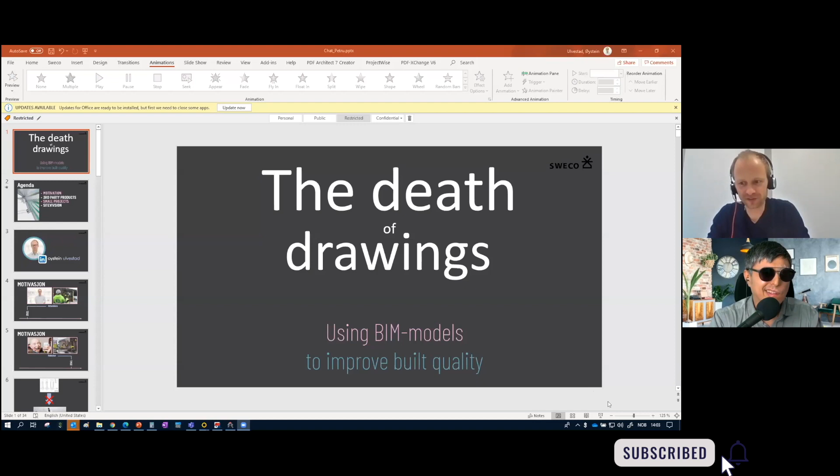Thanks for letting me speak about what I love to do. It's not that often you get to speak undisturbed about the things you really like. You are more than welcome, and you are in the right place because this is what I try to do here. I'm really looking forward to learning from these things because you're working with so many interesting and exciting things.

Thank you very much. So we tried to find a catchy name, so we called it the death of drawings - using BIM models to improve built quality. The title is because we try to do things drawingless, we try to skip drawings. If we look at the agenda for today: a little bit about motivation, why we try to do things without drawings, why we want to build directly from a BIM model and not from 2D drawings. Then a little bit about the advantages this gives us when ordering third-party products for our structure, whether that be steel or concrete. Then a little bit about what size project you need to do this - you don't really need a huge project to take advantage of this. And as a bonus, we'll talk a little about SiteVision and how that can be used in different projects at the end.

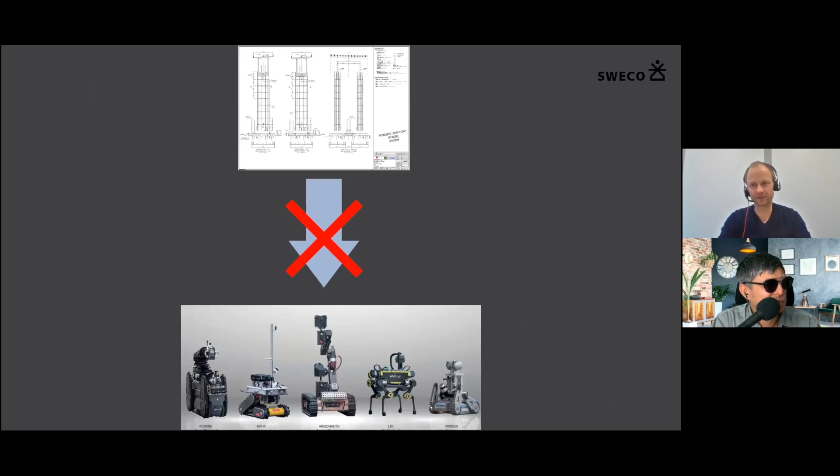If we have a look at this one, this is not the way you will do it. You will not dumb things down to 2D and then feed it to robots. You need to feed them 3D data in some form. Or maybe not even 3D data - they don't need to see it in 3D, right? They can read it as instructions.

But the people making the instructions, they need to visualize it somehow, and that's better done in 3D than 2D. Of course, as long as people are still involved in this. But when we have AI architects and engineers that design a complete bridge instead of us, then you remove the people from the equation, and you have a streamlined, robotized process. Then of course the question is, how do you quality control it without a human? But that's another discussion.

The interesting thing here, and the motivation to do this, is that even in the end, when it happens, you'll have robots doing manual work. But to get there, we need a transition where humans learn to build from 3D models before that can happen.

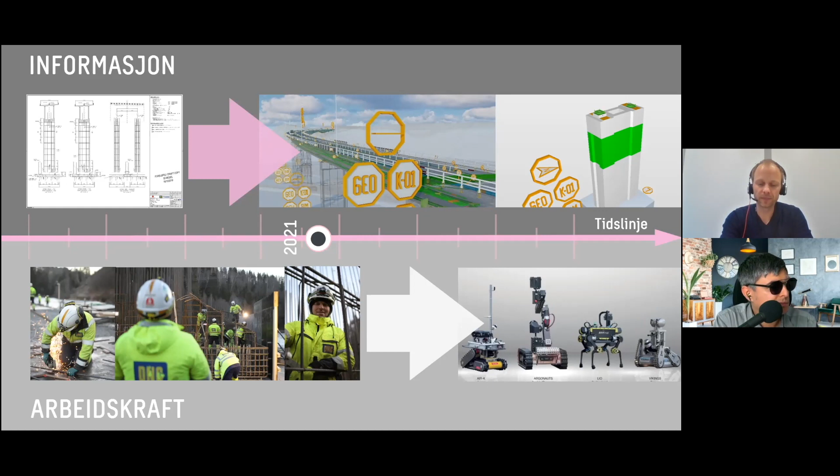We'll also have a look at third-party products, like we said. When we're doing a bridge like the one we're building now, the Randselva Bridge, I'd guess 90-something percent of the bridge is things we produce ourselves - concrete, reinforcement, and to a certain degree tendons. But then we have things like we show in green here.

We have a joint, and it's very important that it's fitted correctly. Normally you'd only have 2D drawings to do this, and in a complex structure with a lot of reinforcement, it's quite hard to foresee everything that might clash. So getting a good 3D model from the supplier is very important. In this case it's Maurer, and they've provided us with the IFC file, which has been very useful.

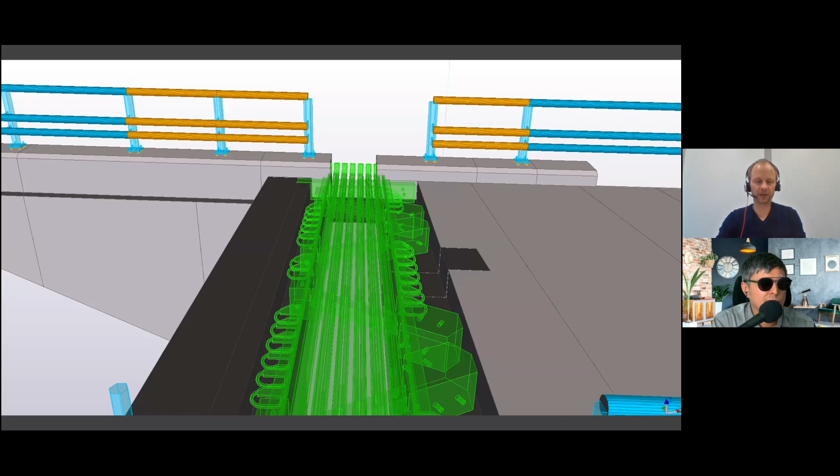Another example is the free cantilever parts. I'll stop here for a little bit just to show the layout of the bridge. So this is the bridge - the joints we had a look at are located at the ends of the bridge, here in axis 1 and in axis 8.

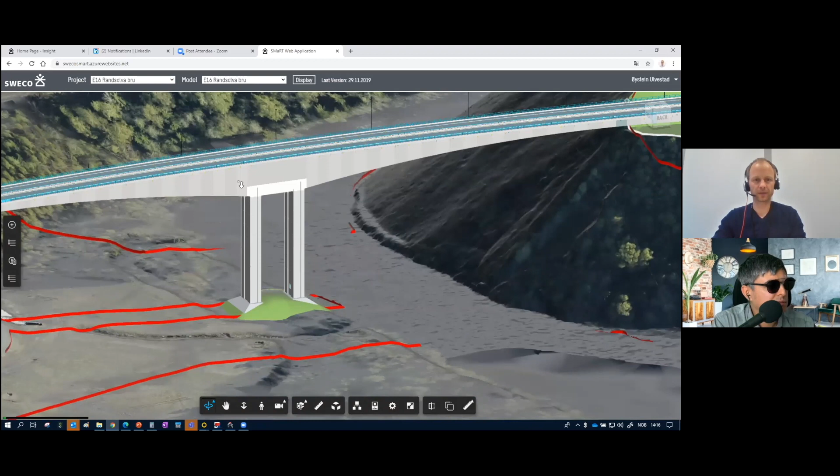For example, when they start building this part, they do the hammerhead first, and then they build the first segments on either side. To build these segments, they need formwork. So you'll have one of these on either side of the structure.

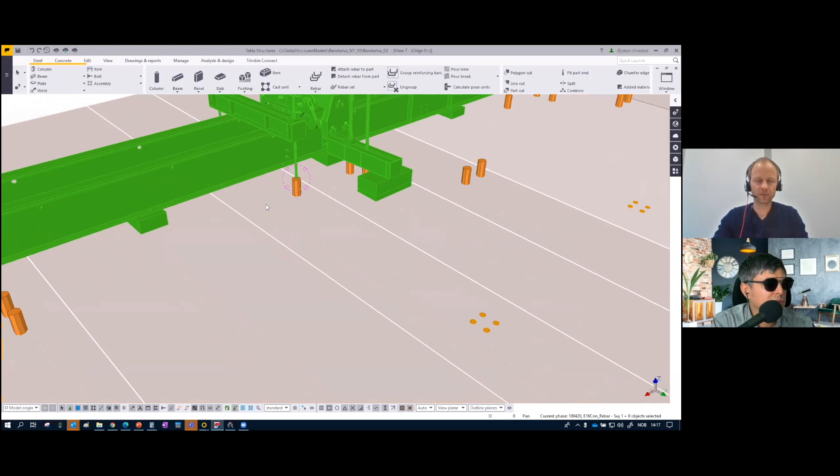And the forces and the weight of this are quite large, so we need to hold them in place, and we do that by making holes in the concrete. Those holes are, from our side, symbolized by these marks. Here we then get a very detailed 3D model of the scaffolding product, so that for casting of the second segment, I can very easily and visually check whether the holes fit the holes I've made in my structure. Because it would be quite devastating if we had to start drilling new holes here.

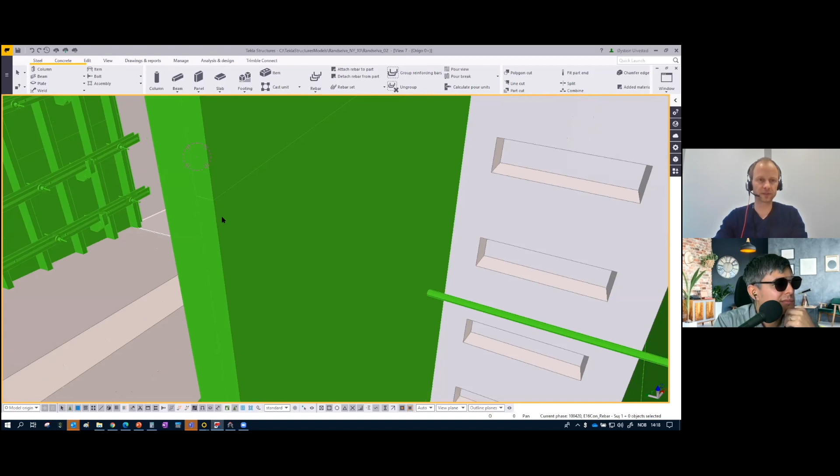And here we see they fit perfectly at all the stages where I need them to fit. And if we go down here on the lower end, we also see that we hit the holes that we anticipate. So this is a beauty of the BIM design and 3D design. We feel we have very good control over things that would be very hard to do in 2D.

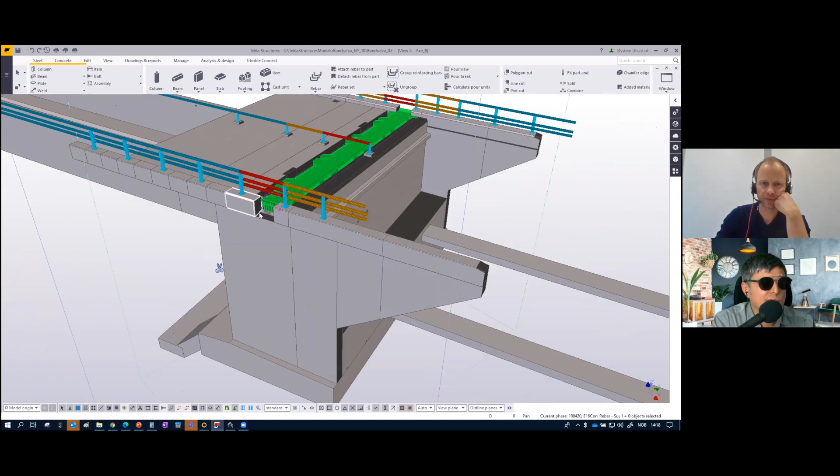And then if we have a look again, here's the joint that we had a look at. What is the joint made of? Steel and rubber, because the abutment is built into the soil, so that doesn't move at all, but the bridge itself expands with heat, and contracts. It's a fuge, right? What is the word in English? Joint in English, fuge in Norwegian.

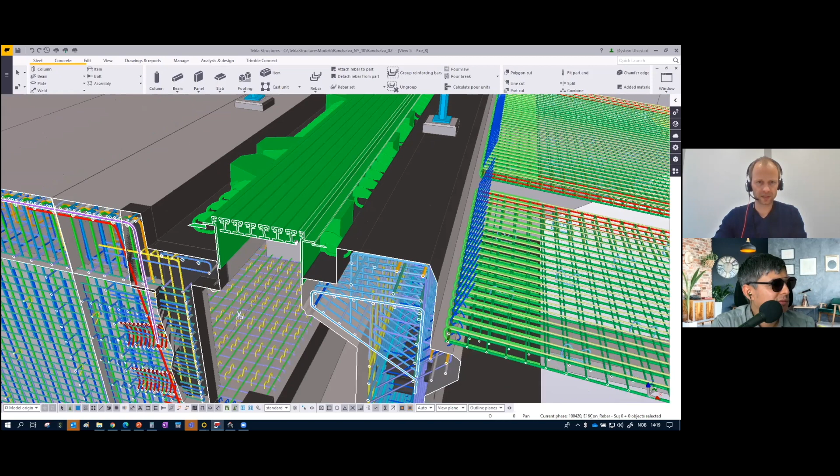And we can then have a look at, for example, the reinforcement, we can then see quite easily what needs to be done. Does it clash with anything we've made so far, and what needs to be adjusted for this to fit, and what bars need to be added so that the joint is properly connected.

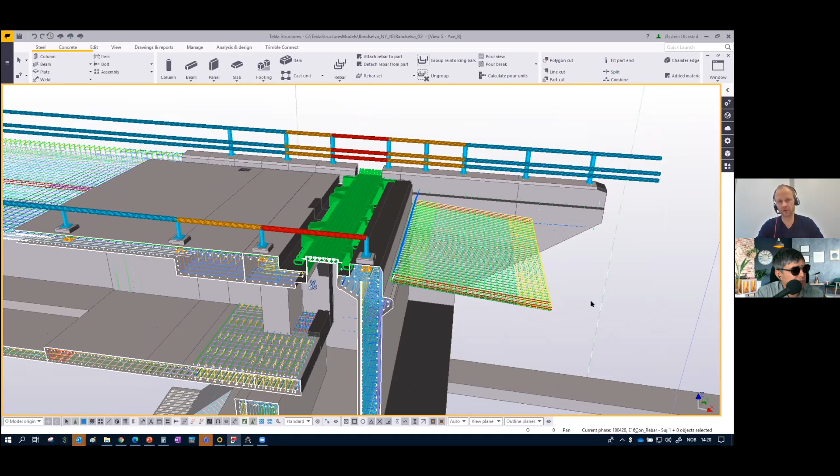So when you write these contracts on third-party products, we see an importance for the people manufacturing and building to have good contracts stating that the third-party deliverer needs to deliver their product in 3D BIM models. That's getting more and more important, because if you only had these 2D drawings like these ones, you would very easily get a surprise at site.

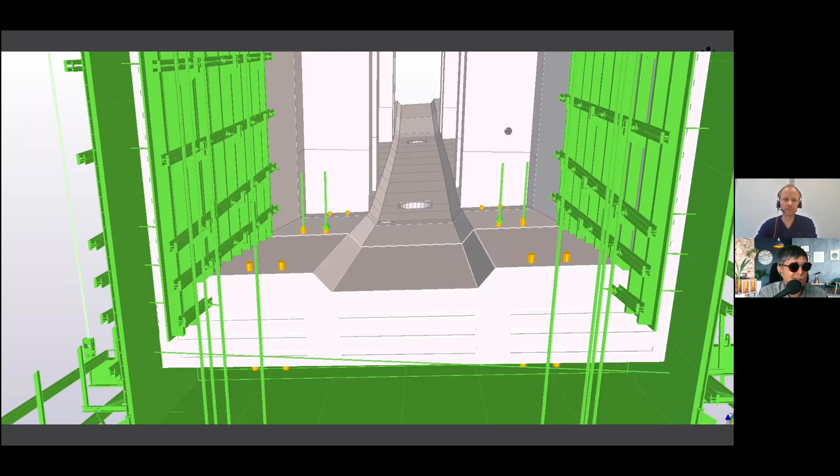Of course, it's been done for hundreds of years, and they've managed, but the quality control you're able to do now is unprecedented. Yeah, that's not an argument, that would be a reason not to improve at all. If we have a better solution, we definitely must employ it. It will lead to more security for people who are working, and let's not forget the very important aspect: saving money, and building it quicker, maybe. Yeah, I agree.

And then we'll have a look at smaller projects like we talked about in the opening. Now this is relatively small, about 4 or 5 meters high. It's a corner foundation, one of 4 in a structure in a building, and it's concrete, and there are some quite enormous forces going into this structure, but it's relatively small in width, and from a 2D drawing, we see there's an enormous amount of reinforcement needed in here.

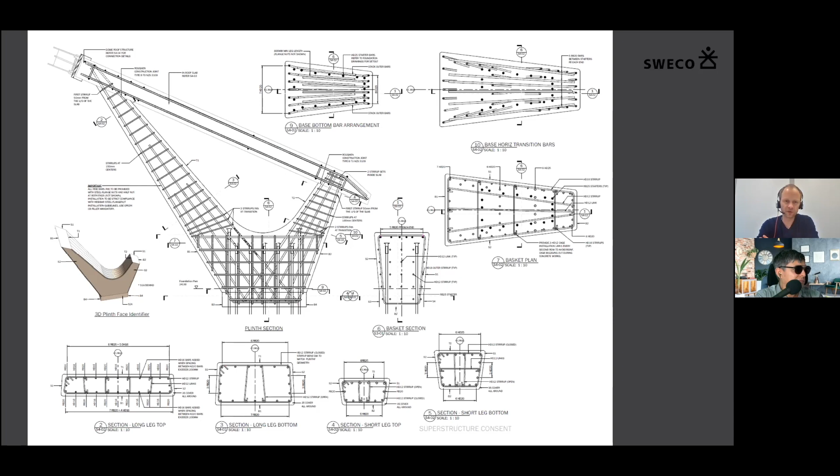When you're doing the design for the reinforcement, it's very, very hard to see in 2D drawings if this is going to fit or not. So if we were then asked if we could do a 3D model of the reinforcement, we'll have a look at the model here now. Let's see.

That's something else. So here. Oh, what is this, a stadium? I wish I could tell you. I can't tell you. It's okay.

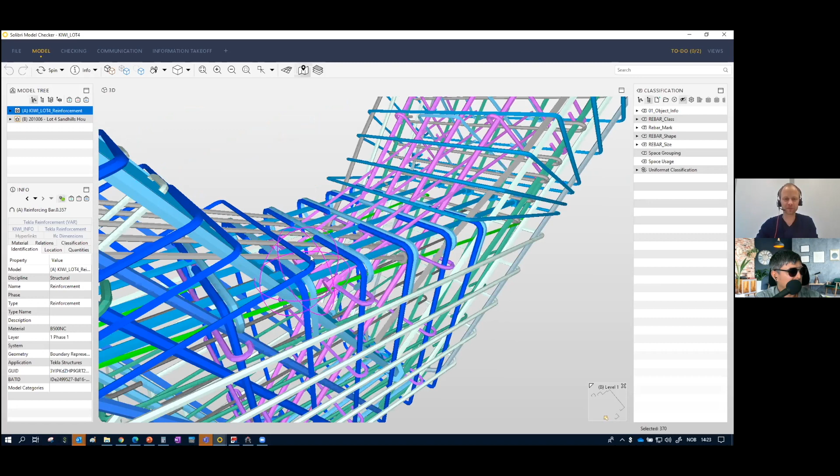It's fine, no problem. But if we see here now, it's packed with reinforcement. It's really, really hard to make it all fit. We worked a number of hours to make this fit, and of course we see some eventual small clashes, but we knew we're going to be able to do that. It's going to be very difficult to pour the concrete here. Yeah, but I'll show you pictures because it's already been cast. Oh yeah, okay, so let's see.

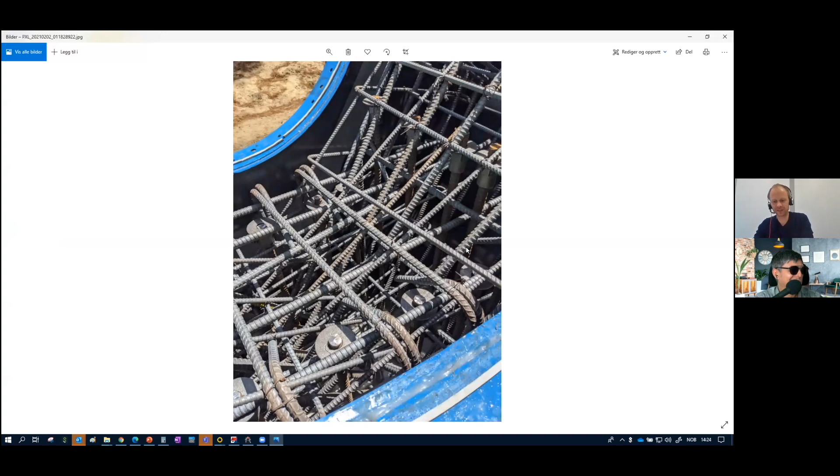Yeah, so this is how difficult it is to fit. Oh yeah, Jesus Christ. You'd need to use a syringe to try it. But without the 3D modeling, it would be a lot harder, because in some of the sections you have 5 layers competing for the same space.

If you don't have the 3D model, there might be a possibility that you cannot build it, because when you did it in 3D, you see that you have place.

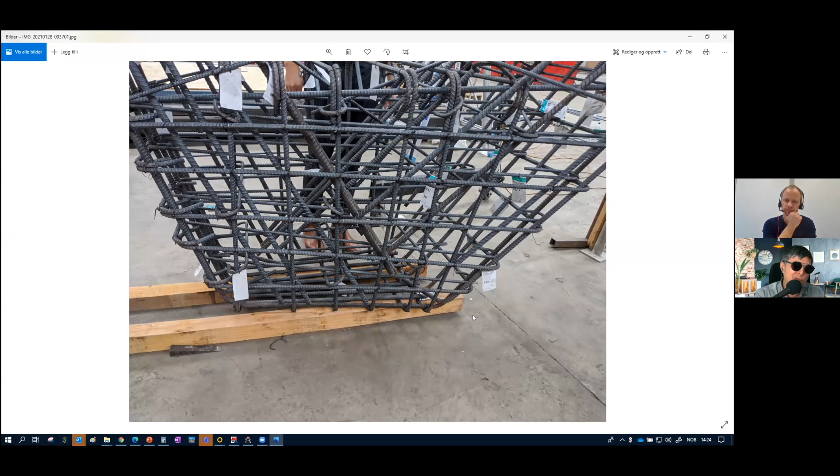If you encounter a challenge, you try to fix it before, right? Imagine being there and being forced to fit all this, and you cannot do it. You just stop the entire crew working and try to find a solution. How much expensive is that to do?

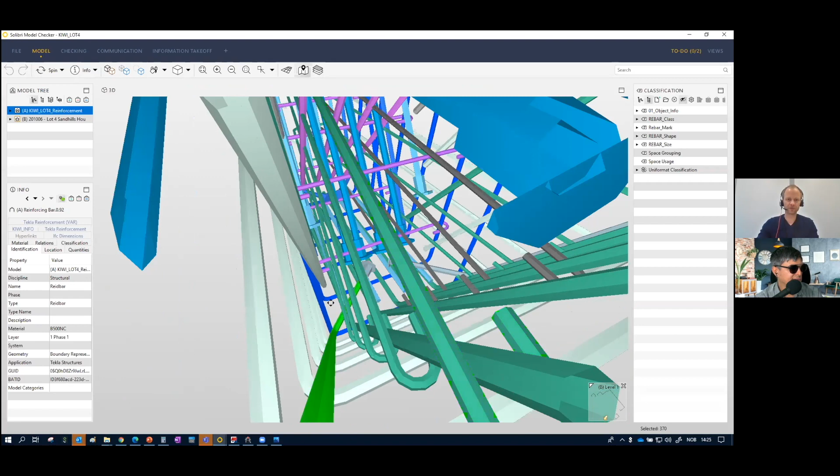Definitely. And as you see, this is a test casting, but it looks beautiful. And again, if we look at some of the layers here, for example this one, see how we have to skew them to make it all fit.

But regarding the one clashing, like what is the thing with them? The ones that we saw clashing down here. Yeah.

Well, these ones, when you model them, you can start bending them separately. But as often as possible, you want a rebar to be part of a group. You don't want to explode it, so every rebar is unique.

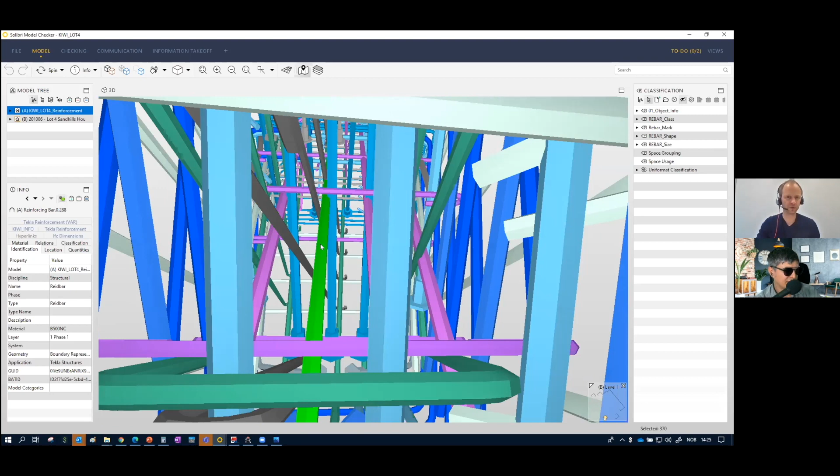So if you can see from your design that clashes are solvable, then allowing small clashes like this is okay, because you can see that if I tilt this a little bit, we will have space.

So what is the measure? What do you do then to be sure that it won't be a clash on the site? So how do you fix this?

On this side, I could show you quickly. Let's see. But before, in the first place, if you would not have a 3D model, you would not have seen this.

Definitely not. And I'm sure they eventually would fit it all, but it would take a lot of manual labor, because what we're able to do now is we can do automatic rebar takeoff with bar bending schedules, so that a machine can bend all these rebars automatically.

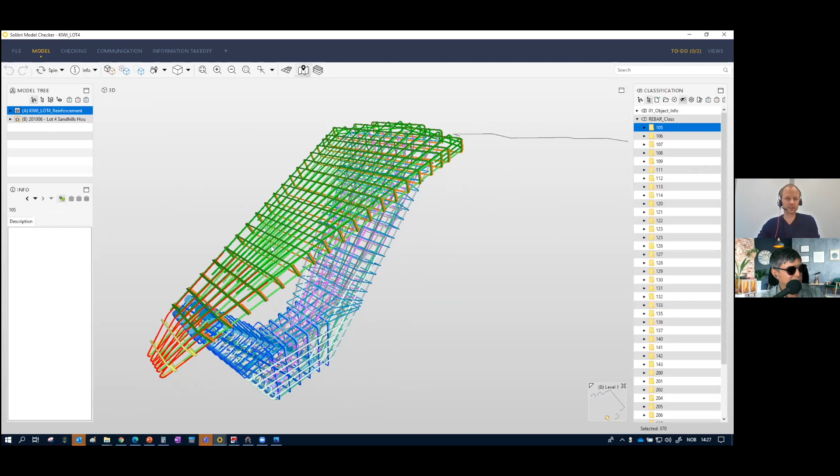And then we do a sequence like this, so that people at site know which of the bars goes first. So from up to down, you just have it in the order they should place them. Yeah, at least our suggestion on how they should place them.

Yeah, sure, I understand. But nice, very nice. Well done. Thanks. And then on an information takeoff, we can automatically take out bar bending schedules.

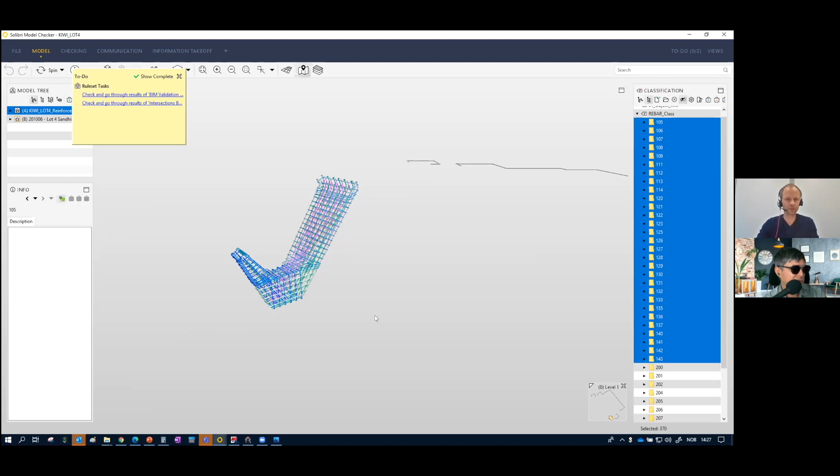And say if I only wanted to take out rebars for the lower part, then I'd just mark these ones, and then do a bar bending schedule for those. And then maybe tomorrow I could do another one for the top.

So it gives you quite a lot of flexibility on large projects, especially when you want to order things.

And do you make any notes in the bar bending schedule for the series of bars that you could not fit in the 3D model, or how exactly do you handle this? We could do that, yeah.

So if we have a look at this one, we have a number of attributes attached to every object, and here we have a number of open comment fields where we could add attributes or information if needed.

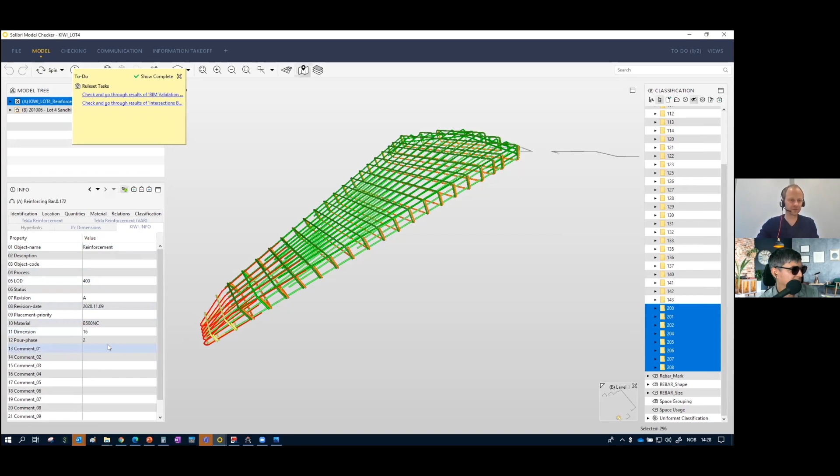In this case, we haven't added much information because there was no need to. But on the Randselva project, we have a lot of information there.

So the casting, I was very impressed by the shape of these. It looks like art. Yeah, it does, doesn't it?

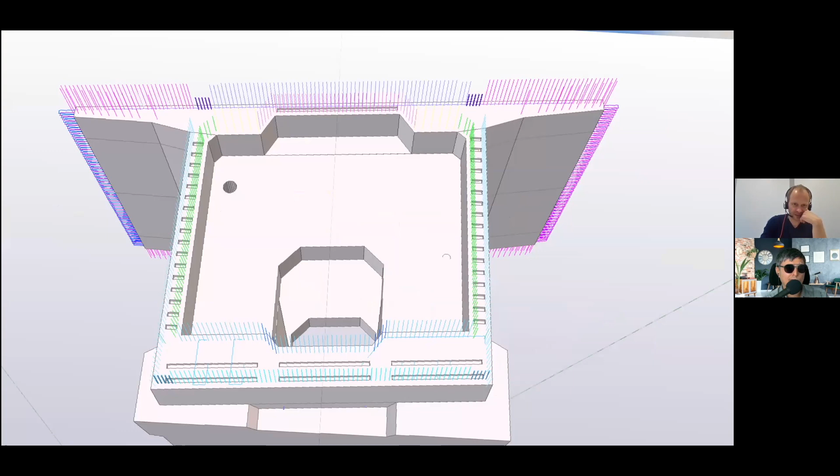Let's see, what else should we mention? Just an interesting comparison: this is the hammerhead of Randselva at axis 2.

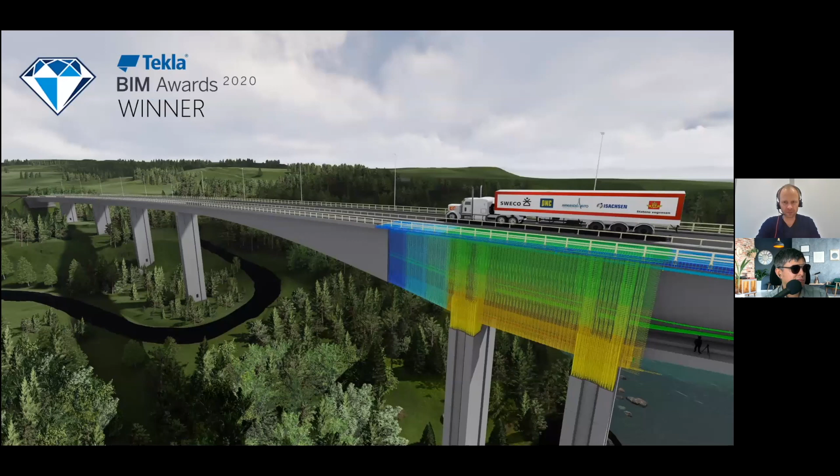And it's been mentioned before, but we are of course very proud that we won the Tekla Global BIM Awards for Best Project in the World 2020. And the last time someone won, it was this project: the Museum of the Future in Dubai.

So that says something really about what a nice company this is to be a part of. Yeah, it was, and it says something about how far infrastructure projects in Norway have come, and how important it is that you have a governing party.

From our case, it's Statens vegvesen, Nye Veier and Vegdirektoratet who work with the industry to standardize data and lead the way, saying that we accept BIM models, we accept third-party control of models and not drawings. So we've been lucky in that way.

Yeah, that's very important. And let's not forget about Bane NOR, they're also doing a great job. Yeah, definitely.

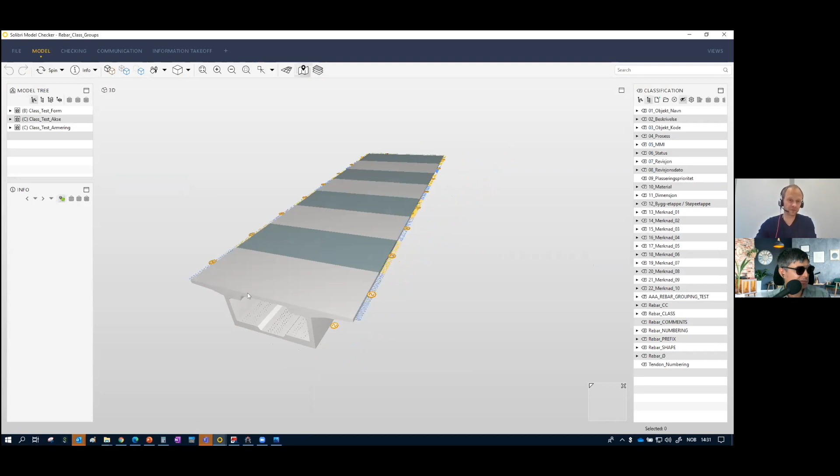Before we go speak about Sight Vision, I wanted to show something about standardization of reinforcement data. Because when you don't have drawings... when you do a drawing of, for example, a section, what you're making is a principle that can be applied to 50 cross sections, and controlling it is fairly easy. But when you do a model, you actually have to control all of the reinforcement of the whole model.

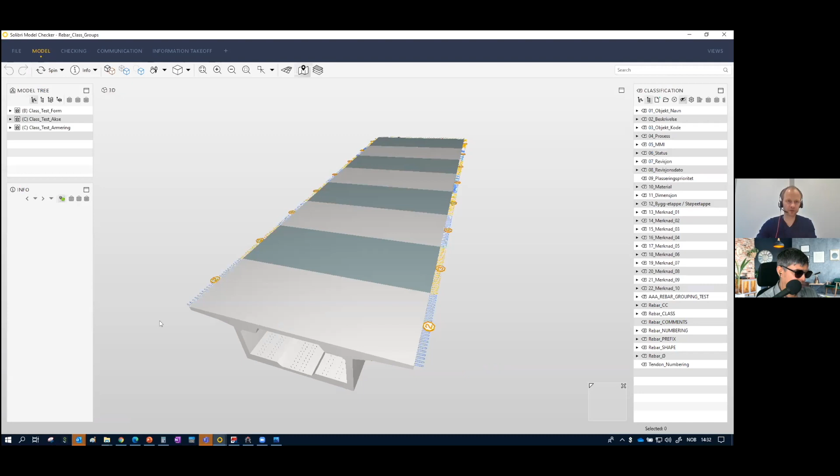So if this was a bridge, instead of just controlling a section, I would have to control all of this reinforcement. And by seeing all of this reinforcement, it's hard to see if there's one rebar missing. So what you want to do is somehow classify your rebars so that it's visually easy to control.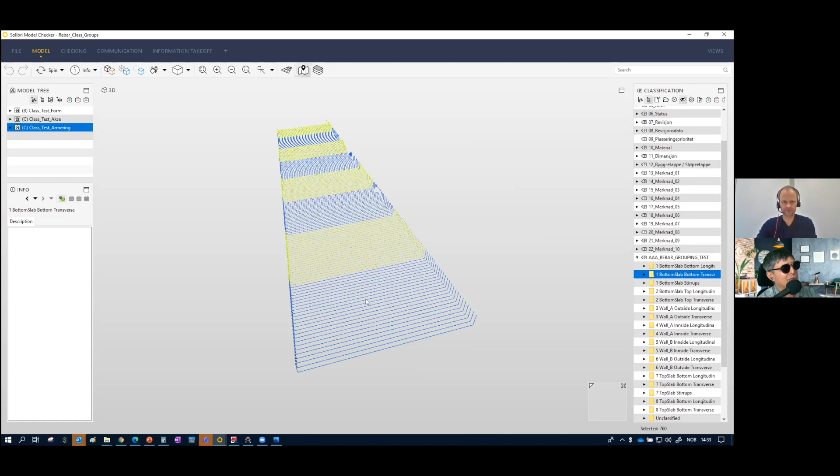So if you see this one - bottom slab, transverse reinforcement - it's easy to understand, and easy to see if something is missing or misplaced. Correct, yeah, I totally agree.

Same with, for example, the wall reinforcement - here we see that nothing is missing, but to do that you need to classify your rebars very well.

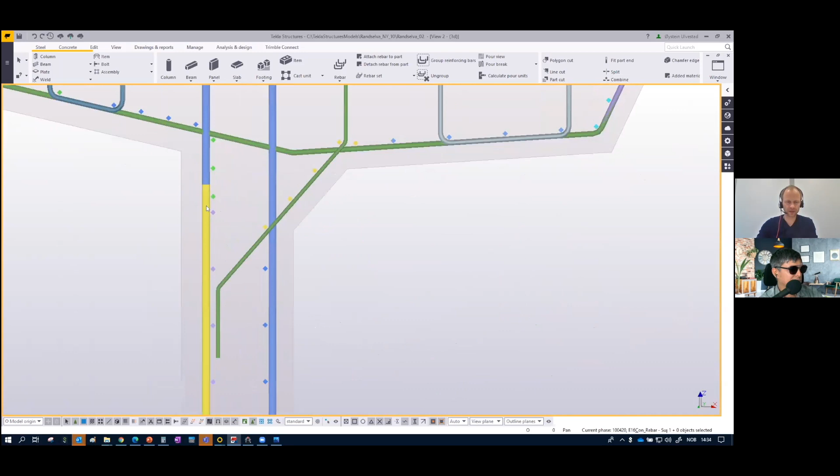So we've used quite a lot of time on these what we call mock-ups, which are simplified, maybe one meter wide parts of the bridge, where we try to make our rule sets for how our model will look. Whatever you're going to do with your BIM model, making these mock-ups will be one of the smartest things you do, especially for things you want to use parametric design to make.

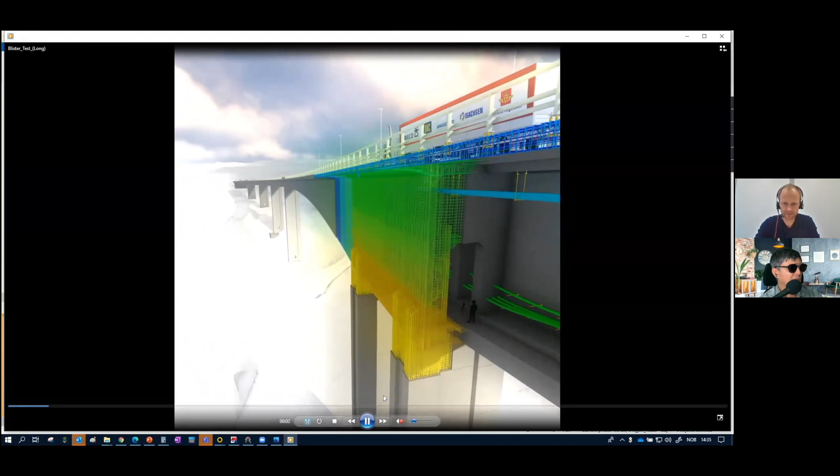And also for challenging parts like blister areas where you have tendons coming. Let's see if we can have a look at that here - that was the short version. Can you see my screen now? Yes. So here we have a fly-through of the bridge.

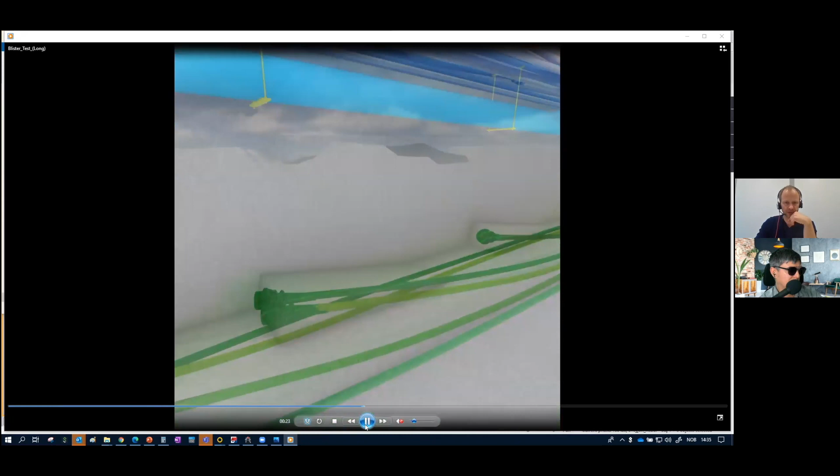We can now see the tendons here, and where the tendons stop. You have different tendons stopping in different casting segments, and where those segments or tendons stop you have what you call a blister, that we see here. And that blister takes a lot of compression force.

So in the old days, the reinforcement of this area - it's very complex, very heavily reinforced - and to see that your design would actually work, you would do a mock-up, a full-scale on-site mock-up. And these mock-ups we now do in our computers instead.

So if we have a look at it - but the challenging part here is modeling. We have about 500 connecting points... let's say maybe 300-400 blisters, and every one of these blisters has unique reinforcement.

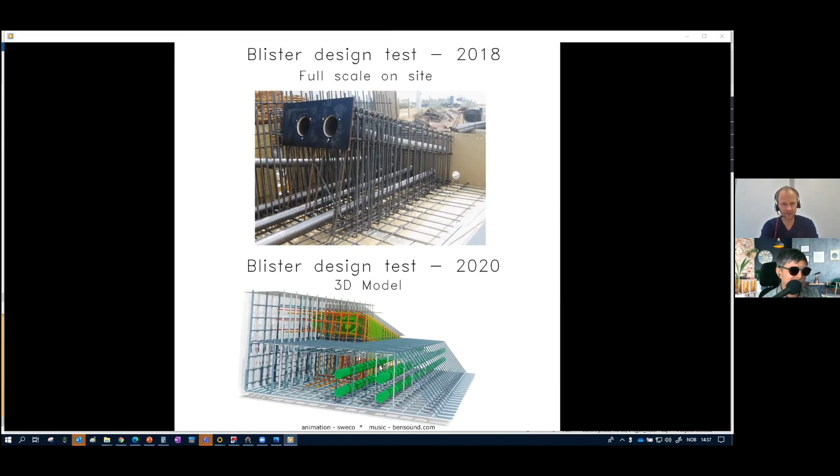And every reinforcement blister has about 100 different unique rebars. So if you do the math, it's a lot of manual work if you can't make rule sets that define them. So understanding your principles and trying to make these mock-ups becomes very important.

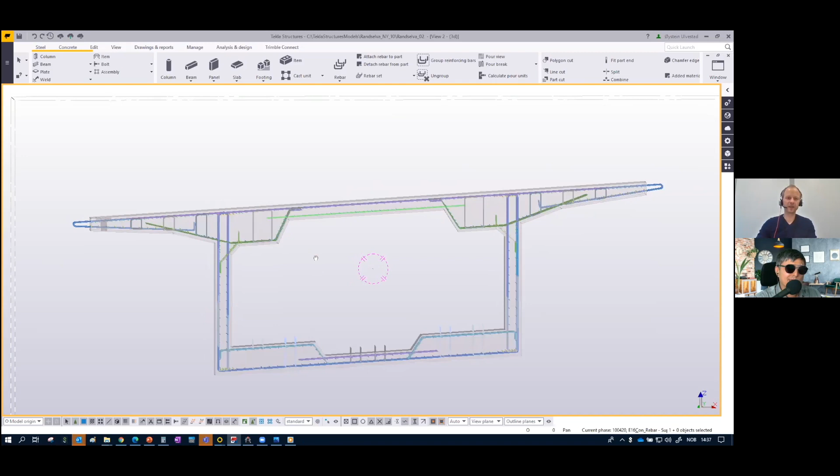So that's a tip to anyone that's going to do this themselves - use a lot of time making good mock-ups for everyone to understand what they're up against. Sounds like very sound advice. Thank you.

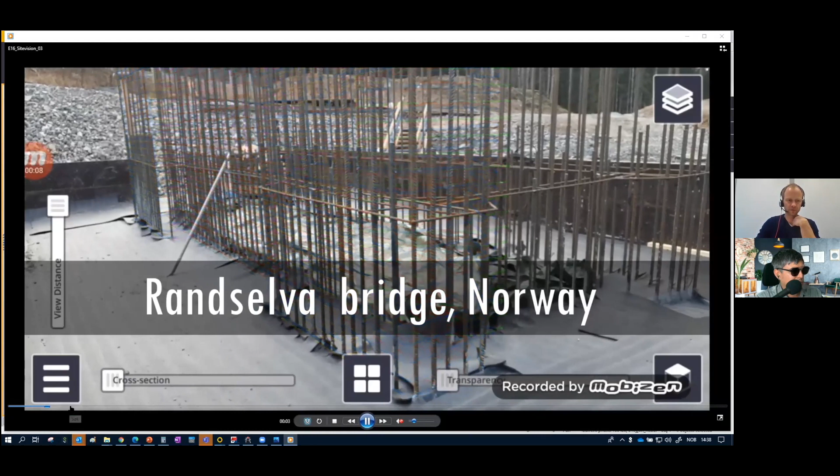Then we'll go on to speak a little bit about Trimble SiteVision. For anyone who hasn't seen it, let's have a look at this video - first we'll look at the device itself. So this is Trimble SiteVision, it's an antenna connected to some kind of display, and the display has this program called Trimble Connect and Trimble SiteVision, where you're able to display holograms on the phone. It's a bit like Pokemon Go, just augmented reality.

Yeah, basically that's what it is. And if you use this with SketchUp files, you're able to do a lot of graphic stuff. You can also import IFC files - the good thing about IFC files is that then all your metadata can be reused.

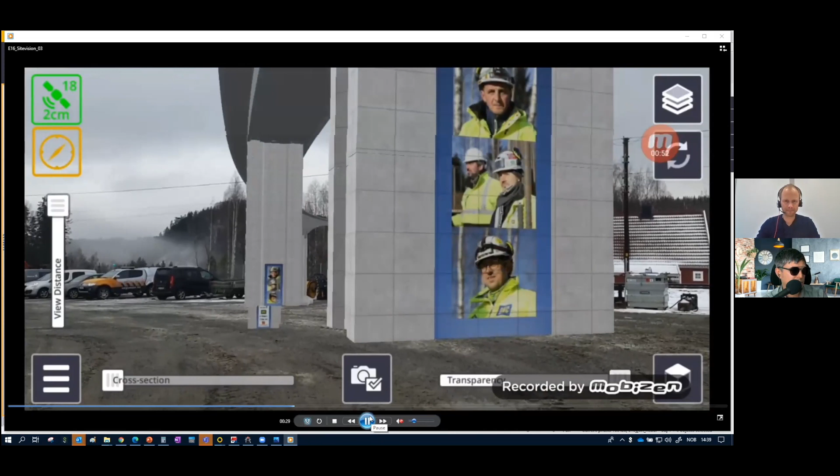And to get this placed correctly, you need the antenna where it places it down to. It's quite accurate, accurate enough to do most tasks. 2 centimeters is the normal accuracy you can get down to.

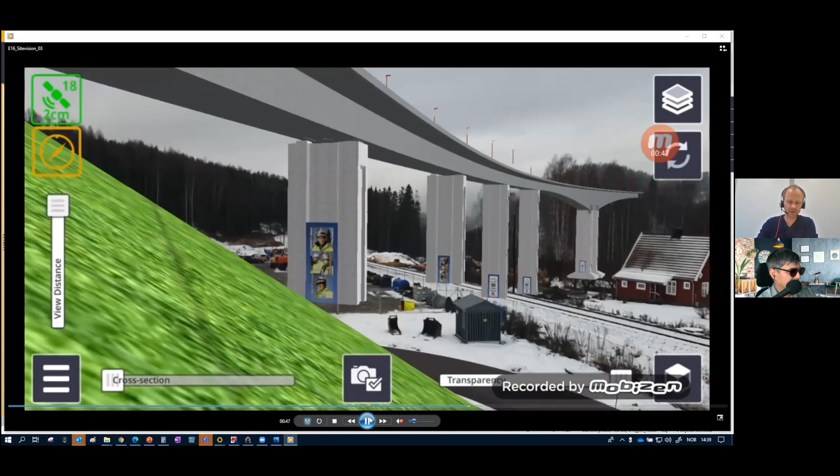For example, here we were going to build this retaining wall, but at the back of it there's a huge landfill. So if the retaining wall was too close to this landfill, we would have to remove about 15 meters height worth of rocks, which would take forever. But by quickly adding it to Trimble SiteVision, we could easily see that this could be built in front of the wall, so that was not a problem at all.

So it definitely has its place and value. The hard thing about this product, though, is that whenever something is shadowing your satellite, it gets hard to place it correctly. But you can use it without your antenna as well.

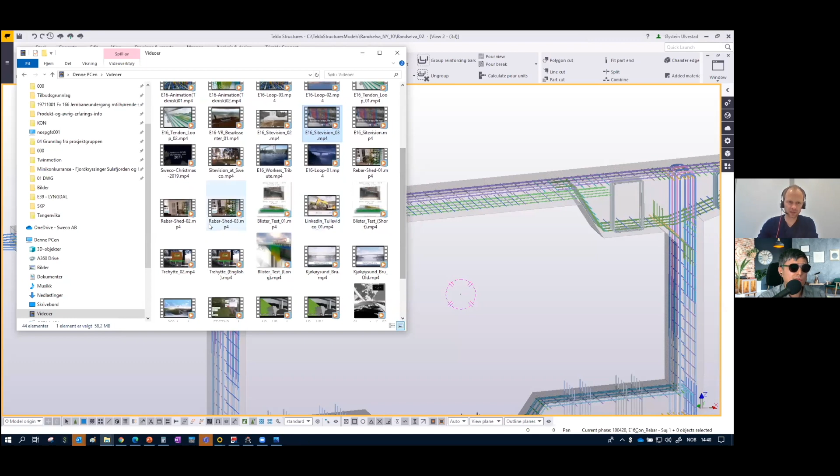Like we'll see here, this is just me goofing around at home. So this is just a pretend rebar mock-up to protect my own popcorn. So my boy wasn't at least virtually able to access the popcorn.

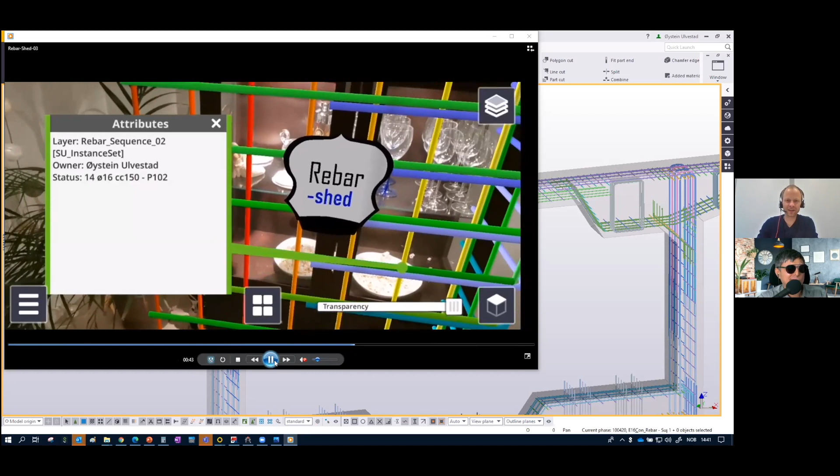And the good thing here is that you could press the rebars and then read the information. So potentially this gets very valuable when you're on site wondering what rebar number this is that you're about to install. And then you could check it, say, from your own sofa at home, because this is done only on a phone.

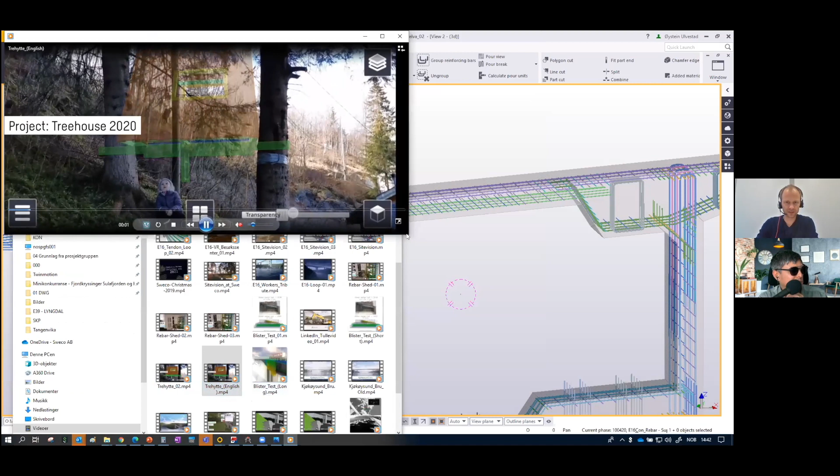At this point I don't have the antenna connected. And then if I want to do design, for example - what do you mean you did it on your phone? Can you install Site Vision on your phone? Yes, correct.

You can use it normally, and the gyro in your phone understands where the model is supposed to go when you move the phone. Of course, you have to place the models manually, so they're not geo-referenced, and the accuracy isn't millimeter accuracy, but for my kids to understand what we're going to build in the back of the house, that was enough.

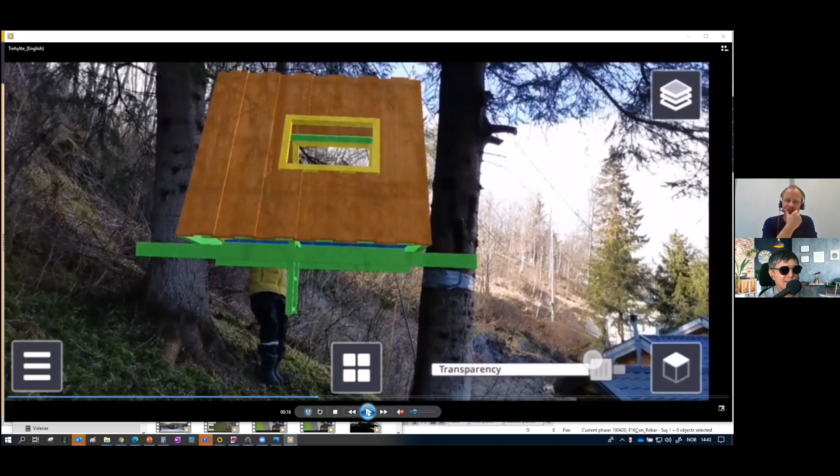Where did you design this, in SketchUp? This is Tekla. You did this woodwork in Tekla? Yeah, and then I imported it into SketchUp and added some colors, if I remember correctly. Nice.

Yeah, it's silly and it's just goofing around, but it also shows - it proves the worth of this technology.

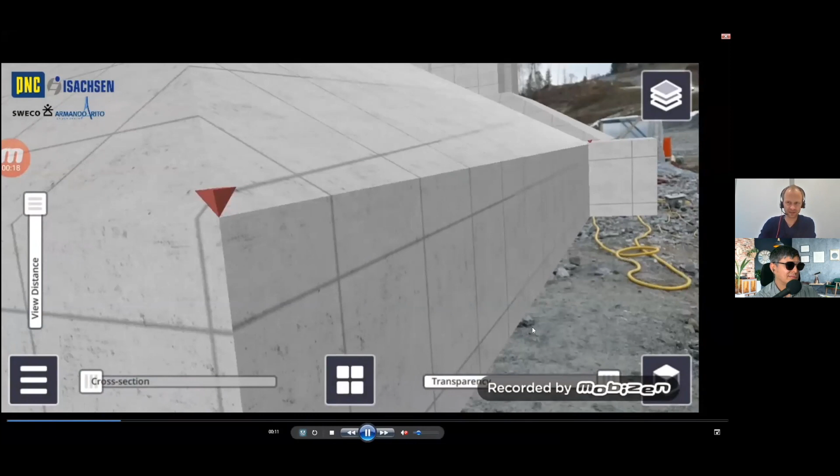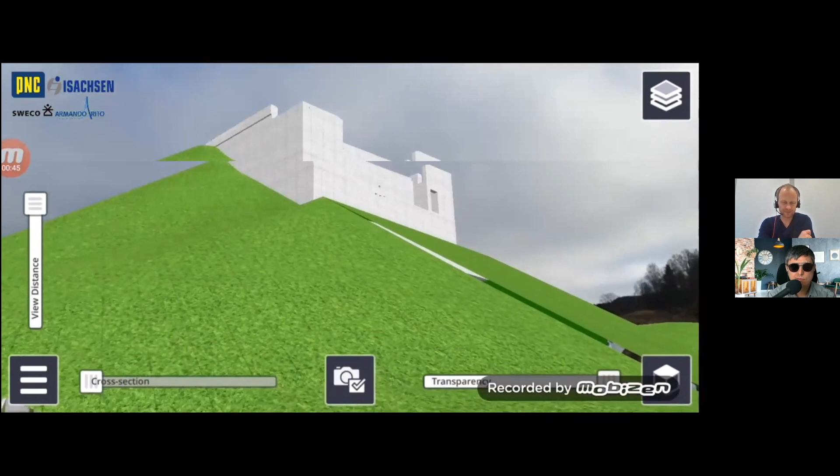And then when you bring this to site, we have some other things here. This is about 1.5 years ago, I believe, before they started casting the foundations at site. And this was also just to check what we were able to do with Trimble Site Vision, just to get a feeling for what we were able to do before we promised too much and before we got dependent on it. You see here, it's quite a nice tool. The trick, though, is to experiment enough with it so you know what it can do and what it cannot do.

Are there any things that you think could be better, that are limiting the experience? Some important ones: the speed of loading a model - it loads your model quite fast, but when you're going to set it out, the antenna takes some time to connect to the satellites to get the position right. But that's not directly something to do with Site Vision itself, more with the GPS positioning. I don't know enough about the technology to know where the bottleneck is.

And the other thing is filtering, because you have potentially an enormous amount of data - you might have maybe 200,000 rebars and only want to see 5 of them. And you only have a small device with 4 buttons to press. So how do you make filters that work, and how can you push small models taken from a huge model to your device without too much work? What about preparing the IFC file - does it involve a lot of work to prepare it to make it usable for Site Vision, or is it quite straightforward and fast?

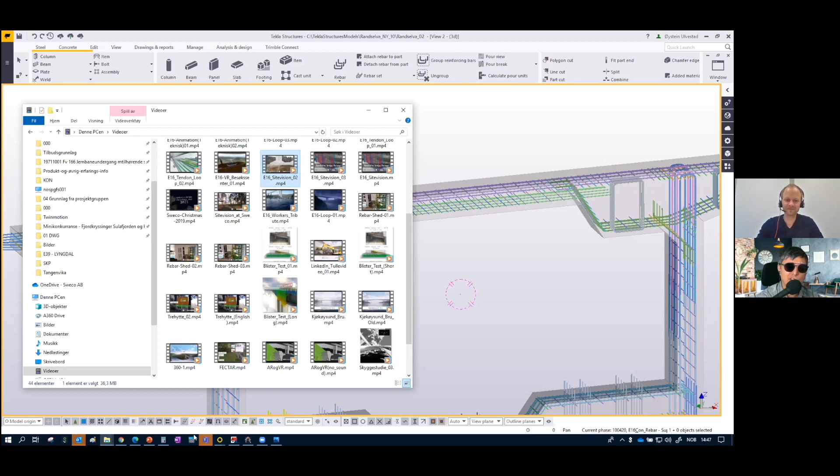I definitely agree, and it's coming at ever increasing speed. The challenge for us is keeping track of what's out there, what is useful and cool, and what's only cool. It's getting harder and harder to keep track. But then again, I guess you have to see it as possibilities.

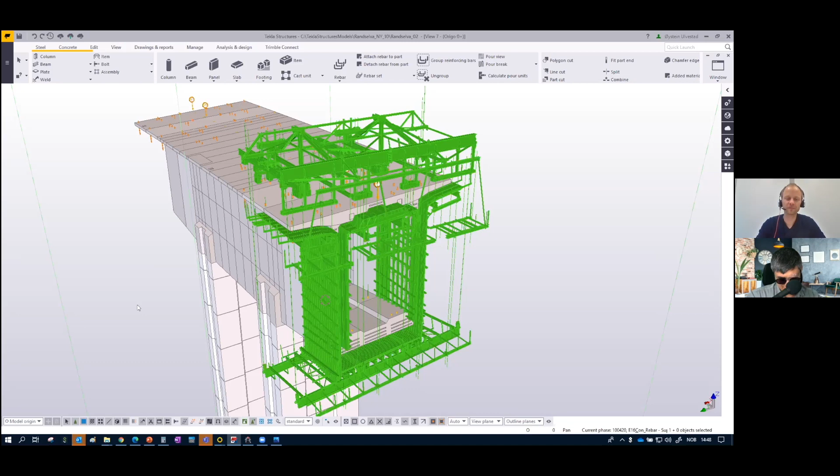You know what's interesting? Next week, let me quickly check... no, it's in 2 weeks, I guess. Because we are talking about AR, I will have a guest presenting a competitor of SiteVision called VGIS in 2 weeks. I really see a lot of potential in this, and I want to learn more about it and spread the word. Cool, I'll attend your live show. You are more than welcome.

That was what I was going to show you. I guess if anyone has questions, then we could do that now. I had some questions, I asked some during the time. I had more questions but I forgot about them. Let's see, I'll try to remember while I read the questions from people watching.

Heiko Denis asks: AR usually reacts to images, barcodes, and similar. I understand that the antenna is used to get the GPS coordinate and compare it to the ones given by the model file. How did your phone recognize the cupboard without an image or antenna?

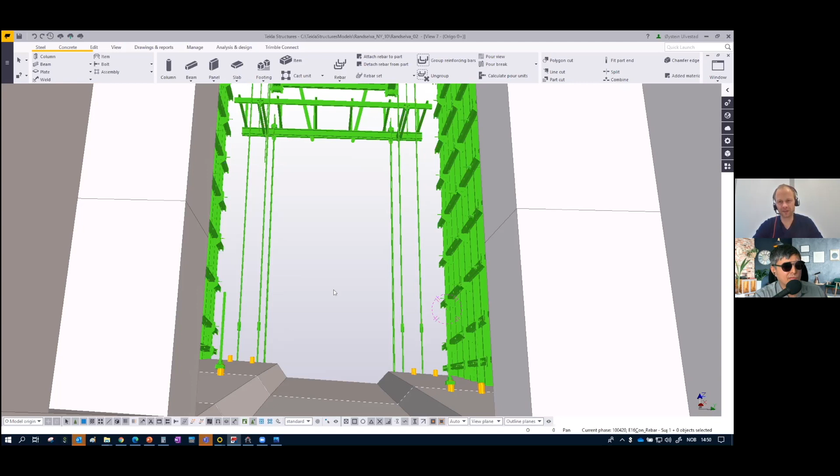When you use Trimble SiteVision, you export your model into global coordinates, so the antenna, or the device, understands where to position your model. In Norway, we're using what's called NTM, I think it's Norwegian for something, I'm not sure what the abbreviation is for, but at least it positions it where it's supposed to go, and that's not something you have to tag at all. So you have one or several files, could be a combination of IFC, DWG, or SKP, SketchUp files, and then it combines those at the correct place.

Next question, Terje Fjellby says that SiteVision uses the GPS antenna, a laser, and the camera, so you can only use compatible devices since it calculates the distance from the camera lens to the laser antenna.

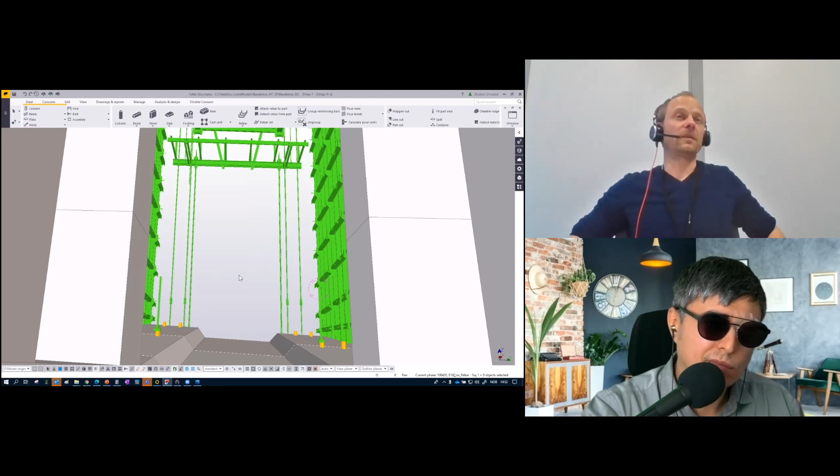I think you could set that up. It has some mobile devices that it prefers, but if you measure the distance between your camera and the equilibrium point of your phone where you connect it, you could basically use any phone. It also needs to know the field of view, the camera setting of your phone, to know what level of zoom it uses, for example. We have a Samsung device of some sort that was what they suggested we use.

Isn't it working on tablets? Yeah, I think you could use that too, because that would be bigger, you'd get a bigger surface to work with, right? Correct, that would be beneficial. But of course, if you're going to hold it and walk around with it, it gets quite heavy, your hands get tired if you stretch them out and hold the device for a while.

Okay, cool. Let's go to the next question. Michael Victoriano, what are your criteria for breaking up your models into multiple individual models?

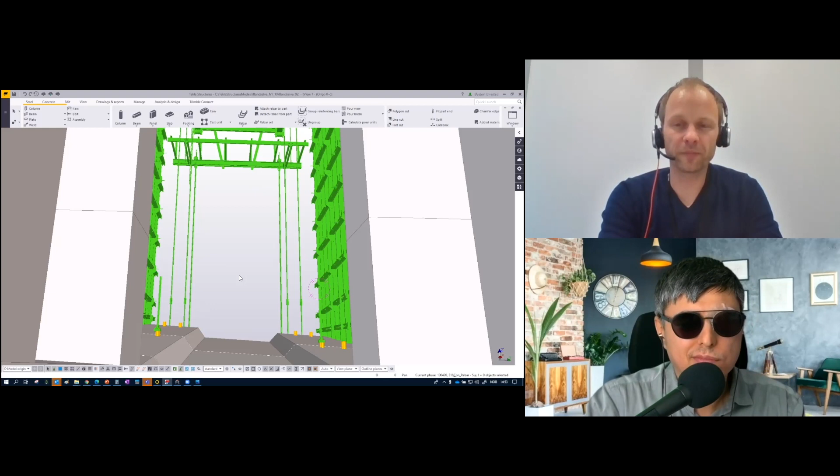Good question. What we see is that we normally have a reinforcement model and a concrete and casting model, and tendons, that's one separate model. Axis is one model, information tags is one model, and then backfilling is one model.

For example, if we have a look at this bridge in this view, every axis and every pier in every axis is one separate little set of models. Because when you're going to control it or build it, you very, very seldom need all information at once. You probably only need this one smaller part.

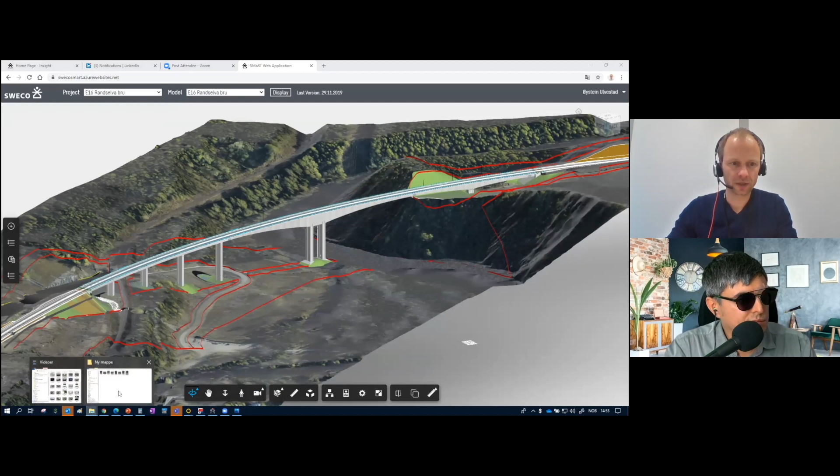So, but I could open a model just so we could see it. It'll take a little bit of time to load it, but while we wait, we could talk about it.

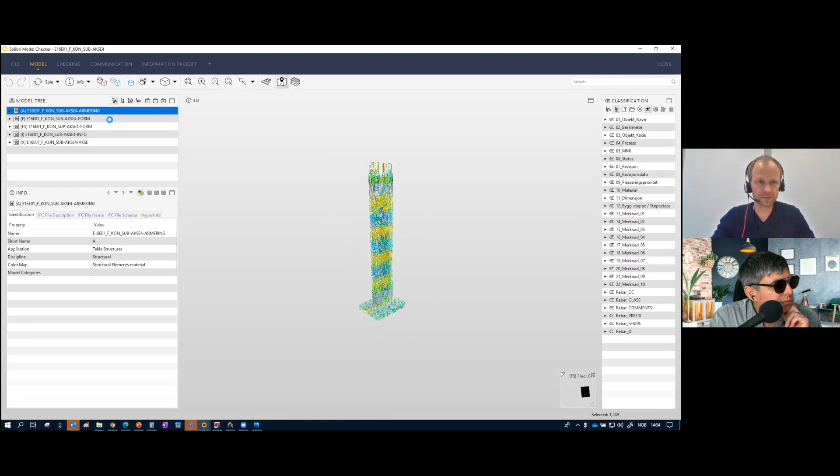Why we divide it is that you normally don't need very much information at once. Here we have axis 4 of the bridge, and if we have a look at what kind of IFC models this is, so we have reinforcement here, we have the form of the superstructure just to understand what we're going to connect to, and then we have information tags, annotations, and axis.

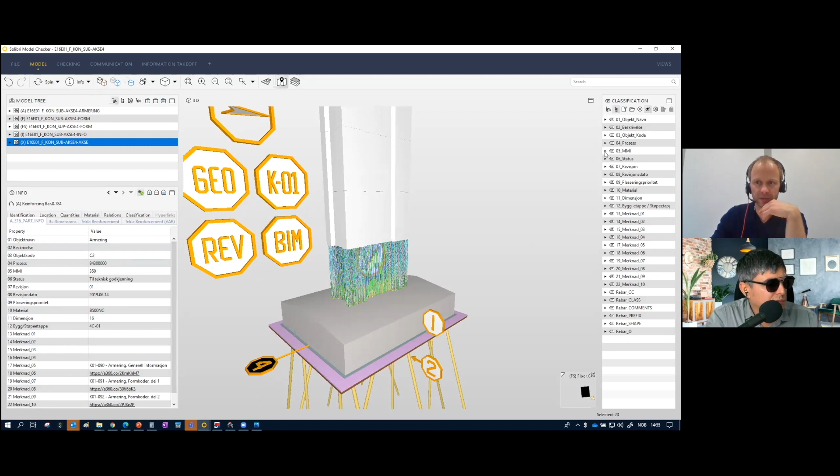And when we combine these, then they turn into this one. Every element that we model here has the same kind of attributes connected to them, whether that is information tag, concrete or reinforcement. They all have the same tags, and that means we could start using these kinds of filters. They go across the different IFC files and can be used for all elements. So again, the whole model is probably made up of 40 or 50 IFC files.

Awesome, I hope that answered the question, but it was very detailed. Thank you. When do you see these type of technologies going to be used more widely, and what are the obstacles in front of them spreading more and more?

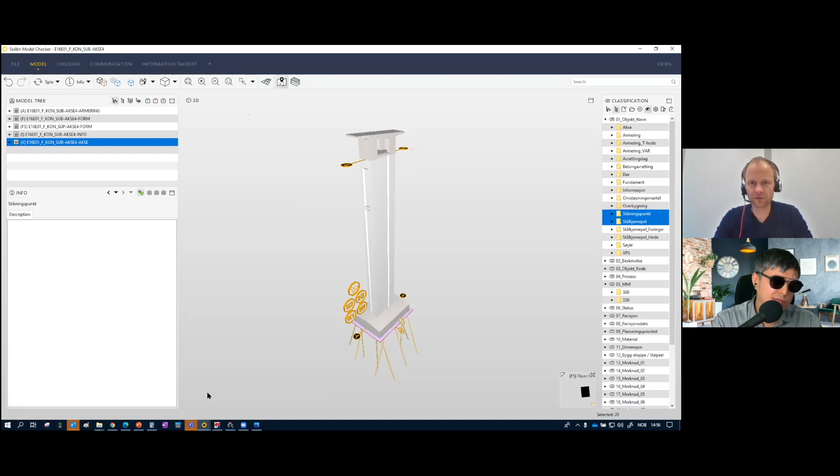I think it's referring to AR, augmented reality. One thing is it needs to be faster to load and more user friendly, because today you need specialists to sort of handle the device. It's a bit too complex and it's a bit too expensive, and whenever you're in the shadow of something above you, the position of your model is lost.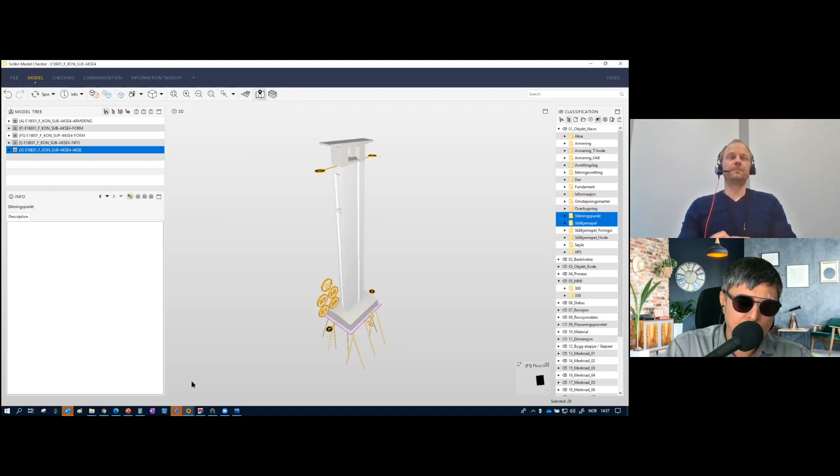So for example, if you're looking at pipes in the ground, it's very useful because you don't have anything above you. But if you have scaffolding around, often you'll see it loses position, and then it takes a couple of minutes to get the model back, and no one has time for that at site. So that's the obstacles I see myself, at least.

But georeferencing things that you can trust is in the right position, that's very, very valuable and useful. So if we compare it to Microsoft HoloLens, for example, which is a helmet that basically does the same thing, but the models are referenced differently, it's not based on GPS signals.

That's also useful, but then you need some kind of markers in the area where you know where they are. And the problem with HoloLens too is that the technology requires quite a lot of education and understanding of the product to place things fast. Early days, yeah, early days. I completely agree on that. It's still early days of the technology, and definitely that is a barrier.

But let me say something. I think most of the serious companies in Norway are dipping their toes into this. They are using it, even if it's challenging. I believe most of the biggest ones are using it in most of their projects, or they are trying it. Yeah, no, definitely. Many projects, right?

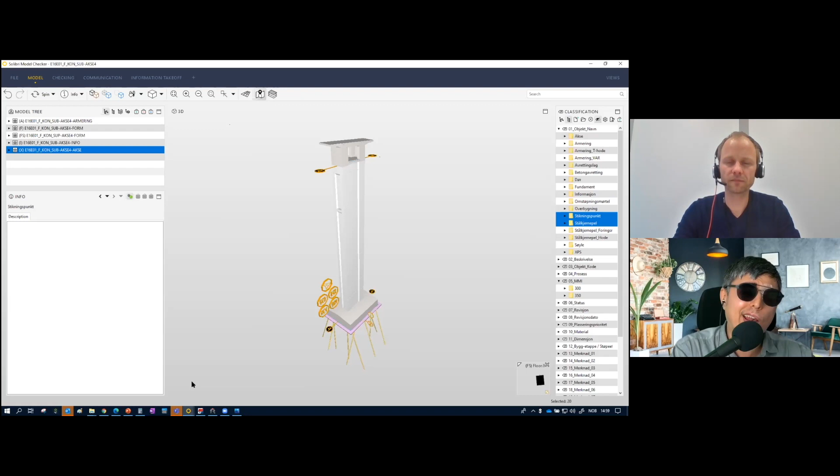So if you are a company and you want to see the potential, you definitely should try, because you cannot understand this just by waiting and watching how other people use it. You need to try it on some project. These tools provide some demos, and you can find interesting things. And of course, they are limiting, but still, even with limited functionality, you can unlock potential, you can unlock things that you cannot imagine.

You need to, or you can do only in your imagination. There's not very many standardized ways of doing it yet, because it's so new. You need someone that has enough time to play around with it, like anything you're going to invent or do for the first time. You don't know what you're going to invent, you have to play around with it, and then suddenly you invented something.

Not only for the construction industry, AR is here to stay. It's a multi-billion dollar business that is just growing and flourishing. Especially for us, because on the field there's so much practical work involved. The tools are here, the technology is here, and the interest is there. Not only in Norway, but companies like VGIS and Site Vision are in many other countries trying it.

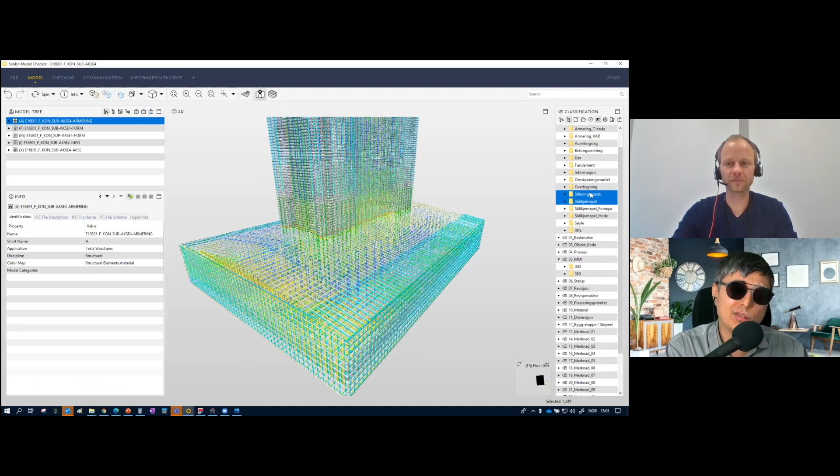Research and development should definitely be something you invest in. If you're a decent sized company, you should have somebody trying these things, because so much is happening. There are many things where you won't find the right way to use it, and you won't understand everything about how it works. But one simple thing can lead to huge improvements on your projects, which will lead to profits in the end.

Okay, let's go ahead. Terje is asking about parameterization of the rebars in the undergirder for the cantilever bridge - do you get dropping lengths? Can you repeat the question? You said undergirder of the undergirder for the cantilever bridge, do you get dropping lengths?

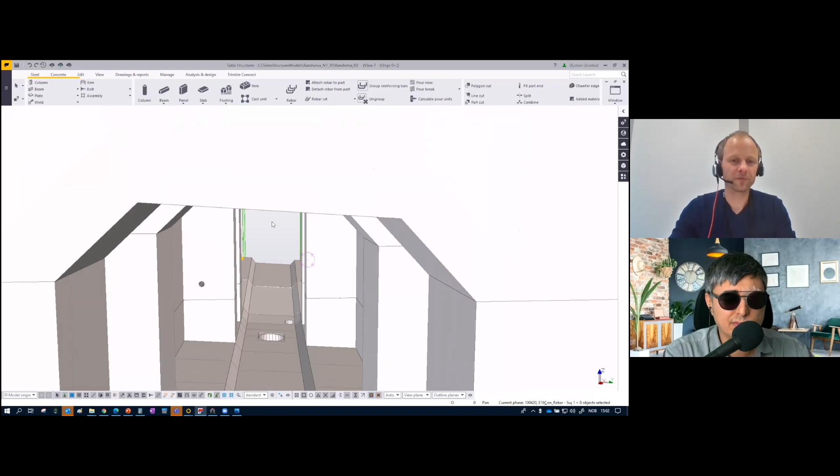Dropping lengths, oh yeah, I see what you mean. Yes, we have parts of it, let's see if we could. I could start another model, that takes a little time. But yeah, we have dropping lengths, and there again we've used comments. Let's see, it will take a little time to load, but as I understand the question correctly, in the bottom here, even though we have reinforcement going longitudinal, at the bottom you'll have rebars that have to be cut if every rebar should be the same length.

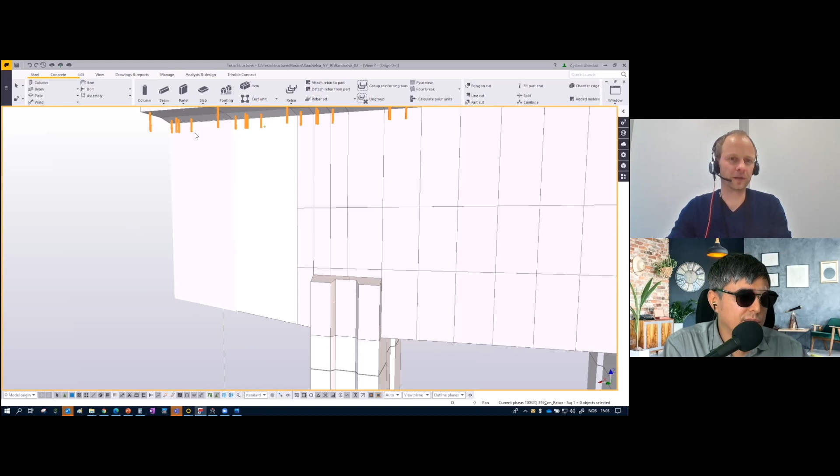And also, since this height is longer than this height, we also have dropping length vertically. But we've solved that by saying we need a minimum splicing length, and then further in we have lengths where the splicing is theoretically too large. Let's see if we have the model here.

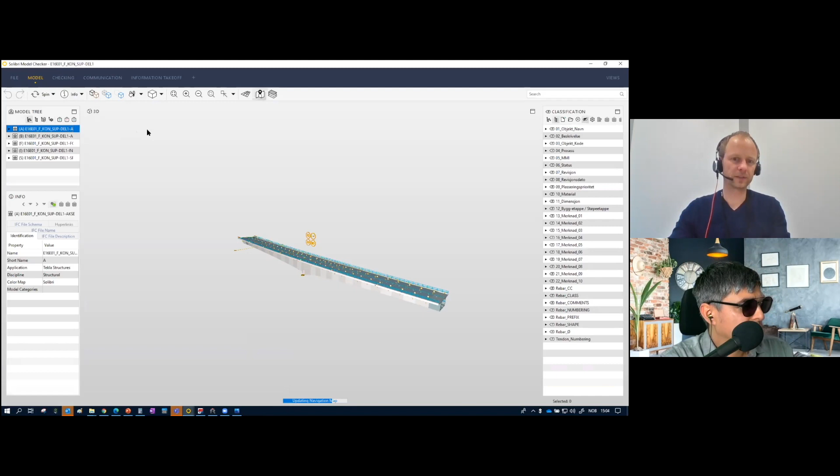So here's one third of the superstructure. Takes a little bit of time to load. Again, we see that we have a number of IFC files that make up the whole thing. We have reinforcement, and we have form, and we have information tags, and here also tendons like this.

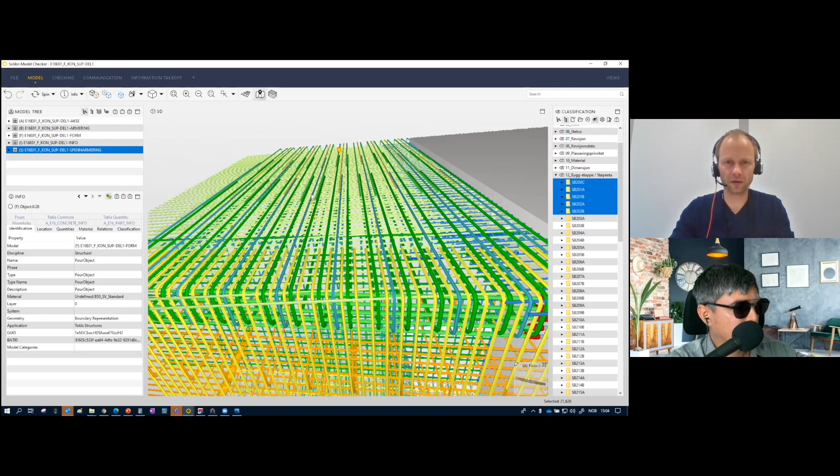If we have a look here we can do, for example, pouring stages. And if we look at this one, we can see that we have a splicing length here, and here they are a minimum of the splicing length. When we come to this point, then they'll be a bit too long. But that's the cost of standardizing the rebars instead of having all of them unique.

Yeah, but I think you must make a choice - will you save more time or more resources? You must find a balance there, right? Yeah, definitely.

Do we have any more questions? Let's see, Victor says great presentation, thank you Øystein and Petru for sharing with us. Thank you, thanks Victor, that's nice to hear.

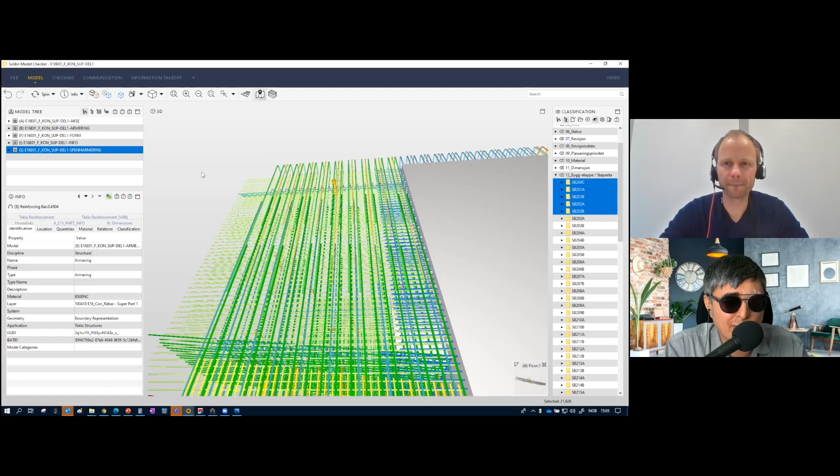Terje again: how do you convey the relative tendon placement in the cantilever part for the workers? Yeah, there are several ways of doing that.

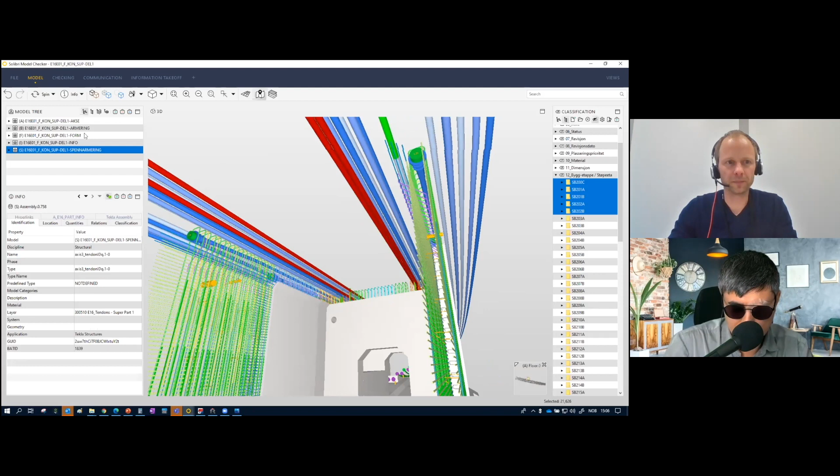When we started this project, we had an idea of how it was going to be done, and now if we could do it again, we would probably model objects going from this point down to some kind of surface, so that you would have another IFC file with data, for example from the bottom of your tendon down to the underside of the concrete. And there you could read metadata from that object quite easily.

We're getting into the detailed parts of the modeling now, but I guess if I didn't answer the question good enough, then just contact me on LinkedIn or wherever, and I'll see what I can answer.

So do that, Terje. Let's see. Michael Victoriano, thank you for answering my question, I learned something new today. Thank you BIMvoice, Petru, and Øystein. You're welcome, Michael.

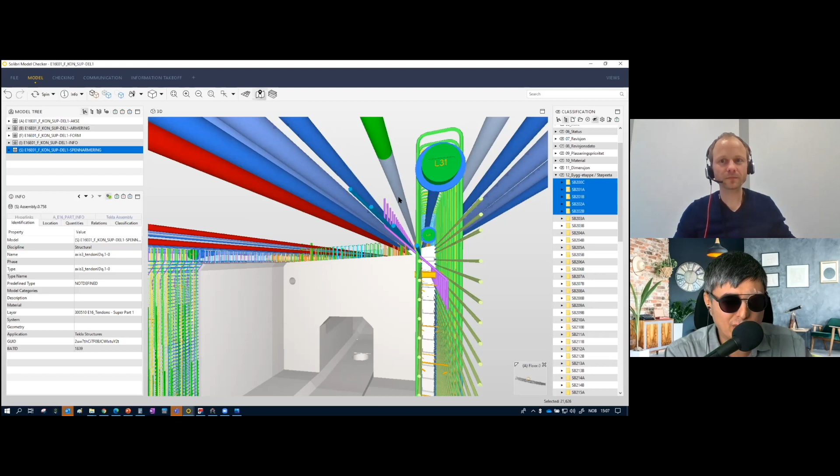Victor is asking: hello, didn't get the presentation from the beginning, are you still preparing 2D drawings? Sometimes we don't model everything. How about the other details?

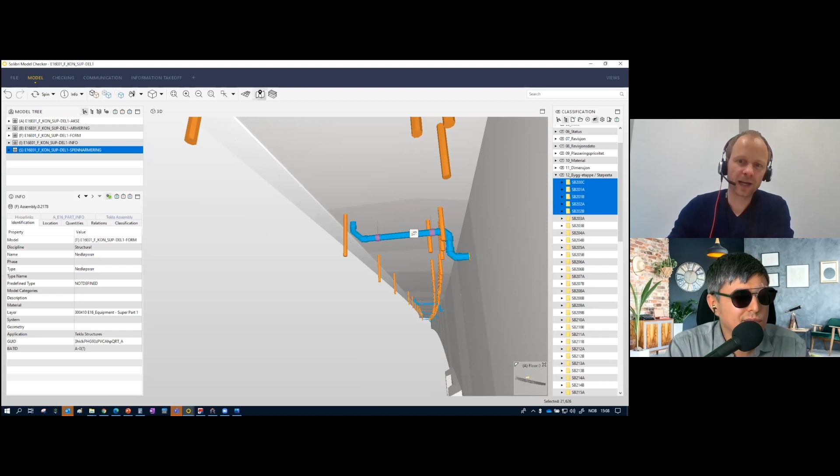Yeah, on this project, in some cases we have third-party products. For example, drainage, where initially when PNC is building this bridge, when they contact the people producing the drain, they sometimes prepare 2D drawings. And also we have 2D drawings as principles for backfilling underneath the reinforcement, for example beneath the foundations.

Because the problem with an excavation ditch is that it never looks the same from day to day, so it's a lot better to have a principle here than a 2D or BIM model that's always going to be outdated. So we probably have about 10 drawings on this project with principle things.

Regarding the backfilling, you don't really need to be that accurate either, it's not like reinforcement, right? So it makes sense, but maybe in the future there will be another solution, I don't know. But yeah, that sounds good.

10 drawings instead of how many would you guess would have been necessary for this project? Between 200 and 300. And what we're making are the least time-consuming ones.

The really time-consuming ones would take a lot of time. But again, kudos to the people at site, they are the heroes of this experiment, they are the ones. People at PNC have been fantastic in first taking our models and then using the models in new, very genius ways.

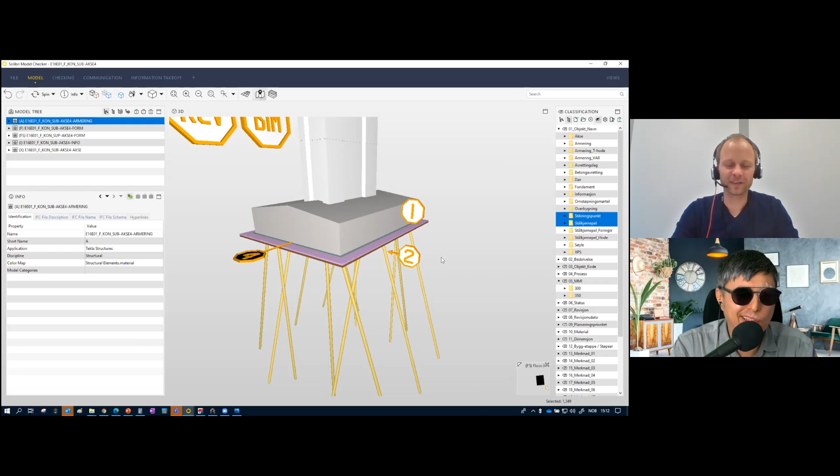But by the way, how much of the bridge is built? About 35% now. Okay, so there's no doubt that it's possible to finish it this way. Yeah, I'm certain. Everyone has their doubt at some point, but I'm positive this will be okay. Very nice to hear that. Amazing, great work.